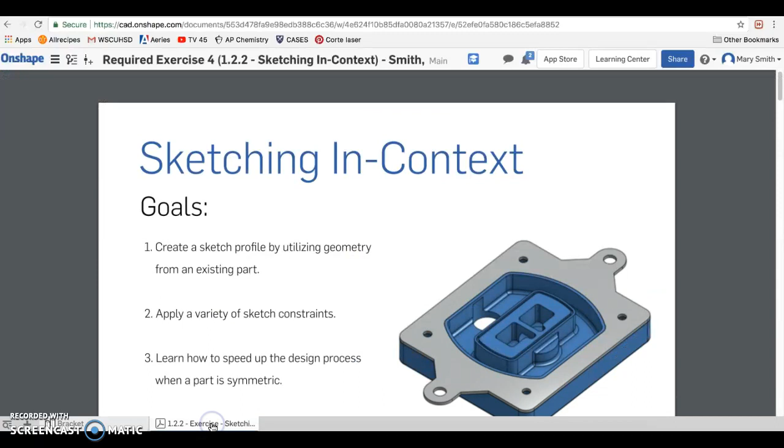On the tab down here, you've got a PDF document with instructions. There are copies of them in the classroom, but the colors and resolution is much better here. So we're going to make this part, this gray part, that fits perfectly on the blue part.

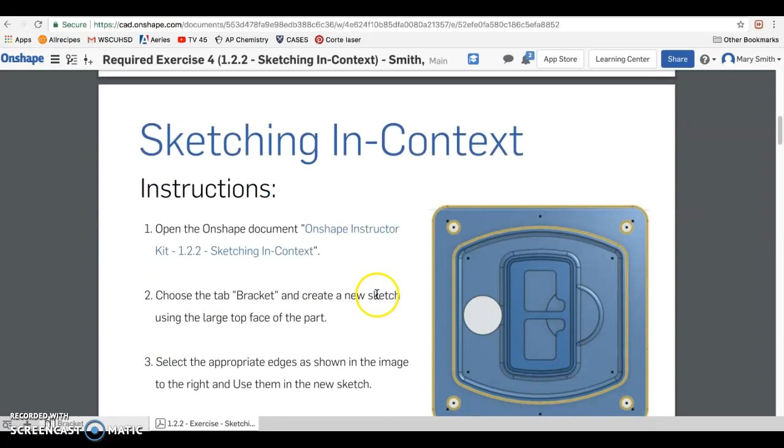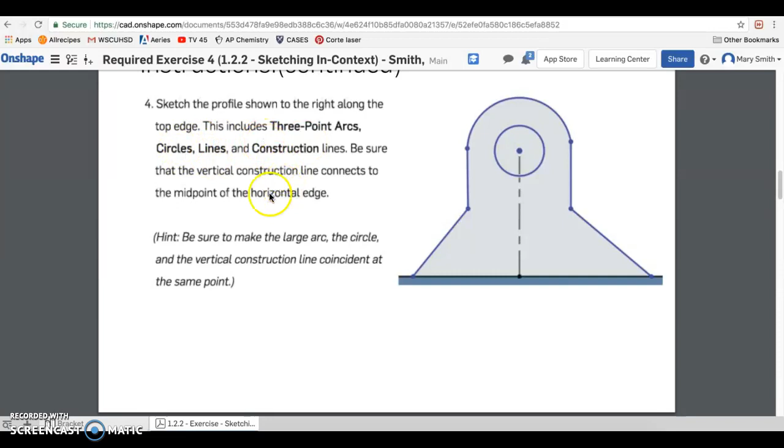First step is to take the existing part and grab some of the lines off of it to work with for our new part. And then on those lines, we're going to draw something that looks like this using the tools that it instructs us to use and with a few requirements.

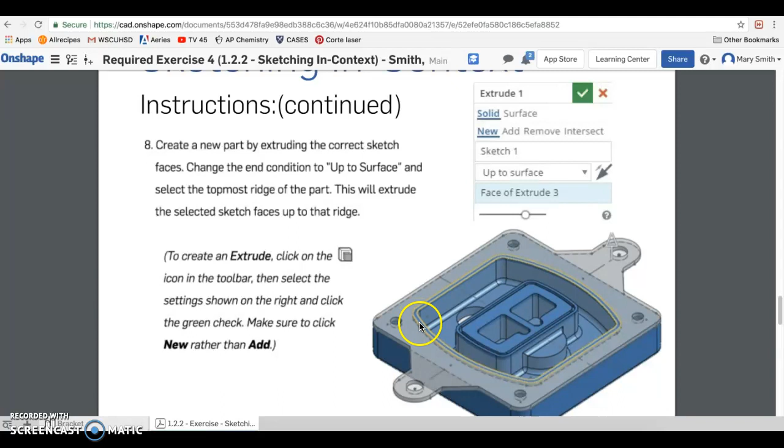And then we're going to add some dimensions to further define it. We will then take that sketch and mirror image it onto the other side of the part. And lastly, extrude the part up to this surface of the existing part that's already there.

So the big idea here being that you're going to be able to learn how to work with existing parts and make other parts that fit on them perfectly.

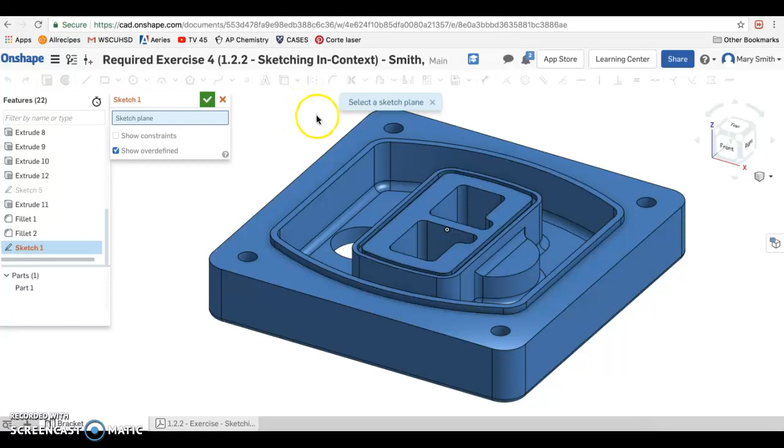So we always have to start by making a sketch, and then we can do 3D things to it. Our sketch plane is going to be the plane, the top of this part. We can then select the top of the part and notice how the parts that highlight are exactly the same shape as what it says in the instructions that I need to reproduce.

So that's why I'm picking that part right there and not like this part. Here, this is the part I want.

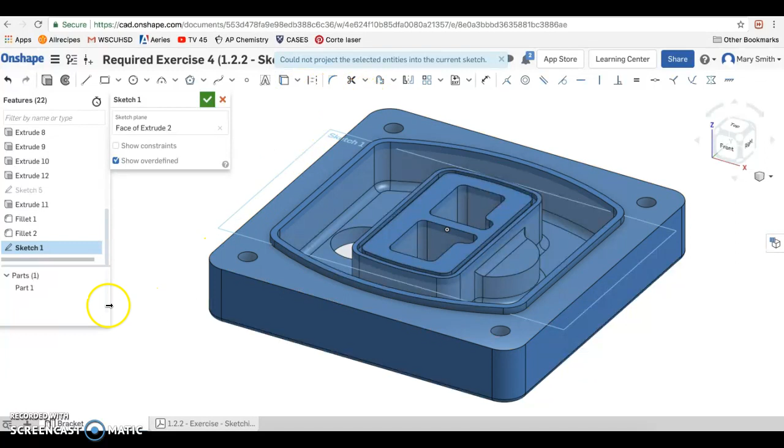So I select it, and then this tool right here, the Use tool, will project that picture onto the sketch plane so that I can use it for my drawings. So I click on it, and it did that. You just can't tell. If you come over here to part 1, that's how you can select that part.

And I can click right here and I can hide it, which allows me to see underneath it. And so now I can see what I actually did was put this picture there. This is the same shape and size as that part.

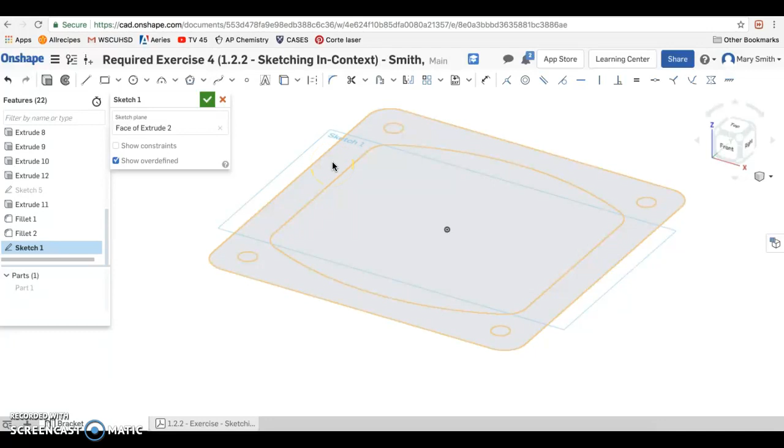So if I'm working off of this image, I know that I'm working off of that part. Also, if changes are made to that part, they'll automatically be reflected on this part. So it's pretty cool. I'm going to look at it from the top and zoom out a bit.

And I'm going to draw that thing right here. And I know what it looks like, so I'm going to draw it pretty quickly, but you would be referring back and forth to the document to make this easier.

So I'm going to make a line. It tells me that that line needs to be in the middle of the top of this bracket. So notice as I cruise over, once I get towards the middle, that little image changes telling me that I'm at the midpoint. If I click right there, the line that I make coming off of it will be coming off the middle of that existing part, which is what I want.

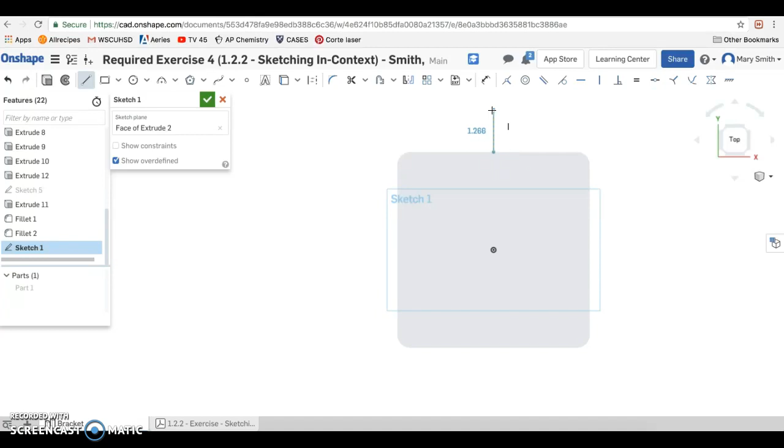Right now, I'm also can see that the line I'm making is vertical. If I move way over, that'll go away. But if you're anywhere near vertical, that'll pop up telling you that if you go ahead and click, you're going to get a nice vertical line.

I escape out of the line tool. It tells me that it needs to be a construction line. And this is the tool we can use to go between construction lines right here that are dotted and solid lines that are normal lines.

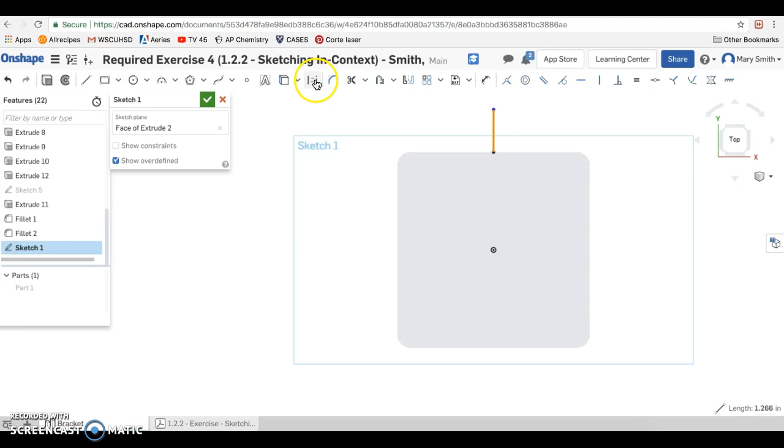And so I'm going to change this to select it and change it to a construction line. The difference between a construction line and a regular line is that construction lines can't be extruded. They're just there to help you position things, and that's all we're trying to do is position this circle right here and the part we're making directly in the middle of that line. So that's why it's important that it was at the middle.

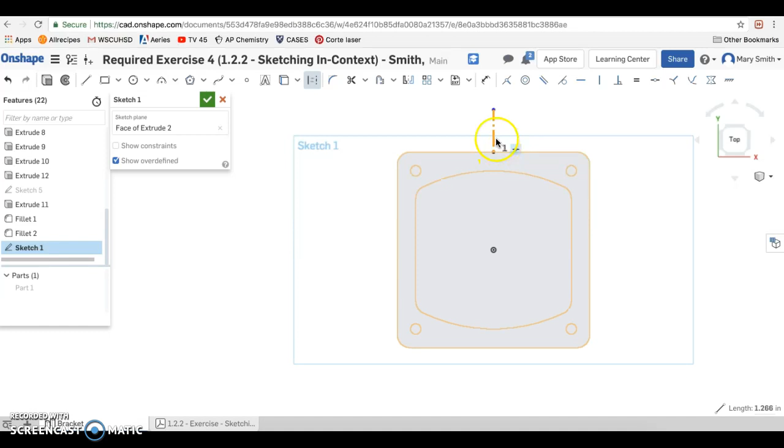So now I'm going to make a circle, and it tells me that that circle needs to be coincident with this point right here.

That means at the same spot. When I hover right over that point, this little T-shaped icon tells me that it is coincident. So if I click there and move away, I'll be making a circle that has its center point shared with that other point.

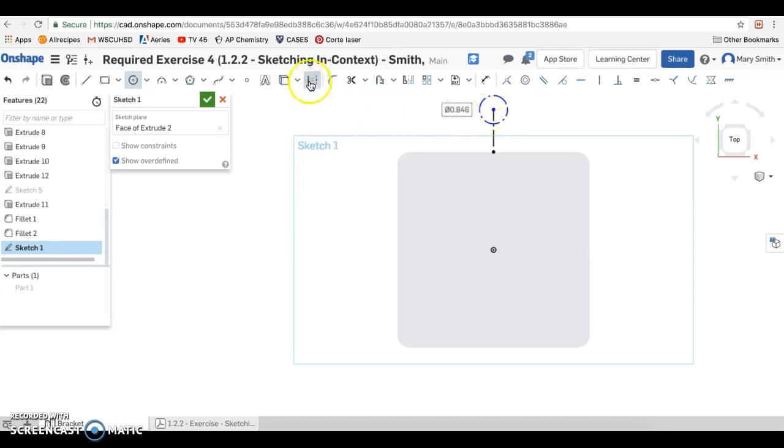They'll be coincident. I notice now that I'm still in construction mode, so I gotta click on that and be like, I don't want that to be a construction line. I want it to be a non-construction line, except I'm still in circle mode. So all I'm doing is making circles. Delete that circle.

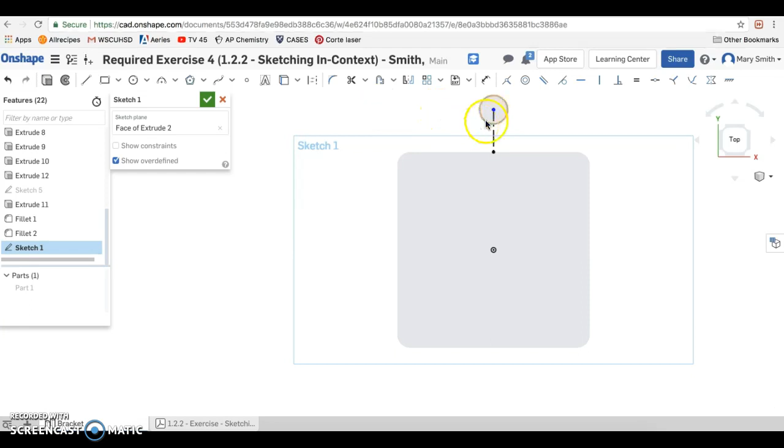There. And now I get out of there. Okay, so now that's a normal solid line, and it will be able to be used to make 3D parts, which is what we're going to do with it.

I'm also supposed to make an arc, a 3-point arc. You can make multiple types of arcs, but it's asking for a 3-point arc, which is already selected. This is also supposed to be coincident with that point, meaning that they're right on top of each other. But I'm going to show you what happens if you don't get that done right the first time. So: 3-point arc, make a line, make a point, and then drag it over to where the end of your arc is going to be. And then the third drag allows you to decide how much of an arc you want.

Uh-oh, I clicked off the screen.

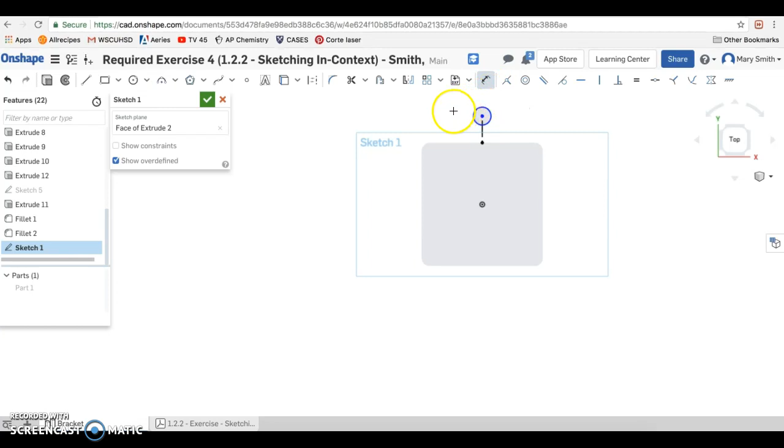Okay, so there's my 3-point arc, and it is supposed to be coincident with that, but see how they're not right there and right there. They're supposed to be in the same spot. So here, let me go over to my toolbar, and this guy right there is our coincident tool, and I can make them coincident afterwards.

If you were anywhere near coincidence as you were producing it, that feature would come up, but you can always make it happen afterwards.

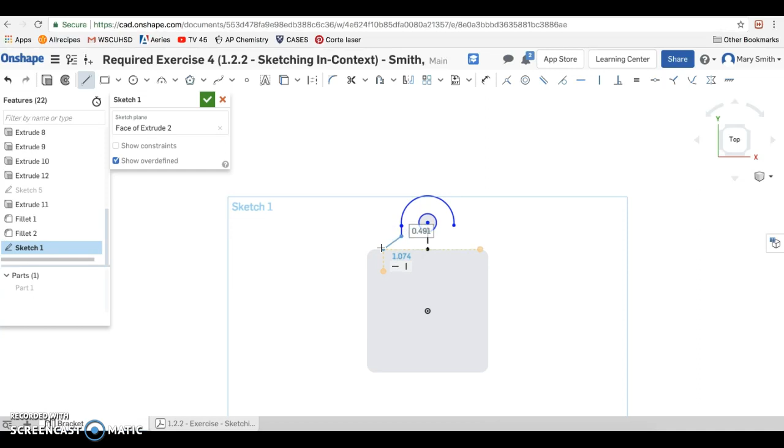Okay, so then I also need to make some lines. I know that there's a vertical line here, so I'm going to go ahead and make it vertical, and then a line going to the edge there. Escape out of the line tool.

I'm going to select it again and do the same thing over here. Make a line that I would love to make vertical. So when that vertical icon pops up, I'm going to go ahead and go with it. And then back to the drawing.

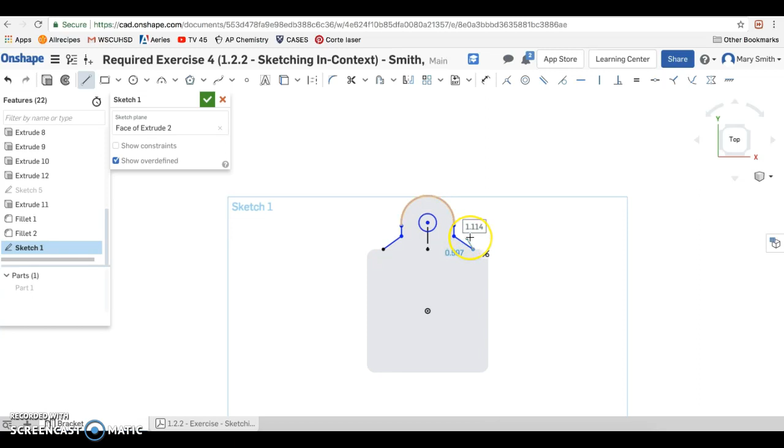Okay, so that's pretty much the sketch I need. And then the next step is to define dimensions, which again are on the instructions. I am going off of the instructions on the side here pretty quickly because I've done this before.

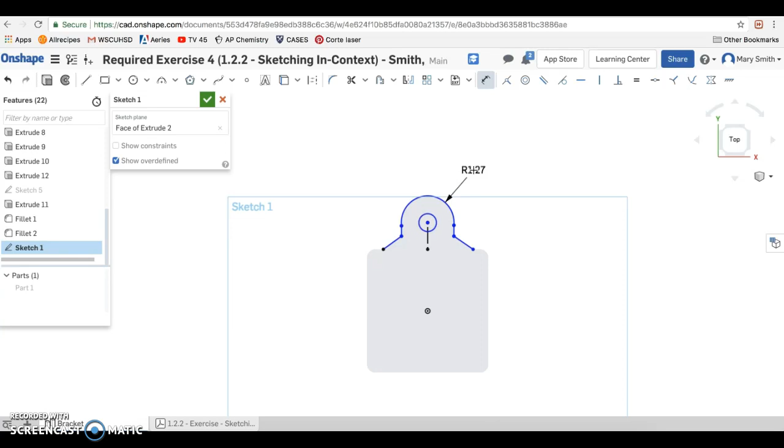So after clicking the dimension tool, if you click on anything that's circly, you'll get the chance to define the radius. The radius of this outer arc is supposed to be 15. So I marked that in and it's like, whoa, it changes it to 0.591.

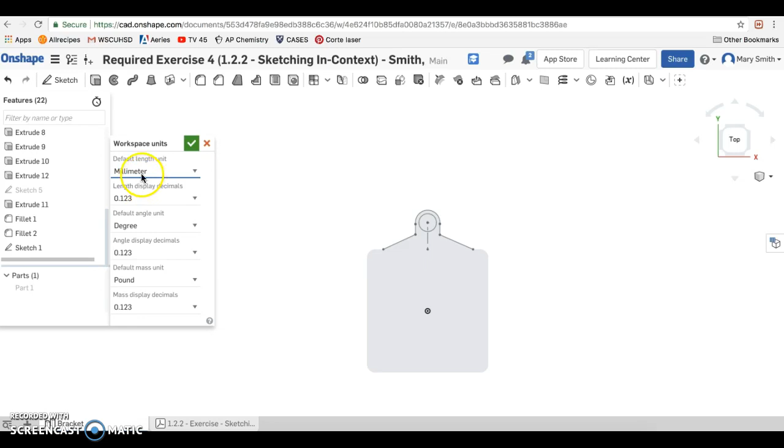Well, that's because the units of the workspace are currently set at inches, and this diagram must be based on millimeters. So I change it to millimeter and I check to say, yep, I really do want to change it to millimeter. When I click on sketch, I can double click on it and I'll be back into where I was working again. Notice how it says R15 because now it's in millimeters.

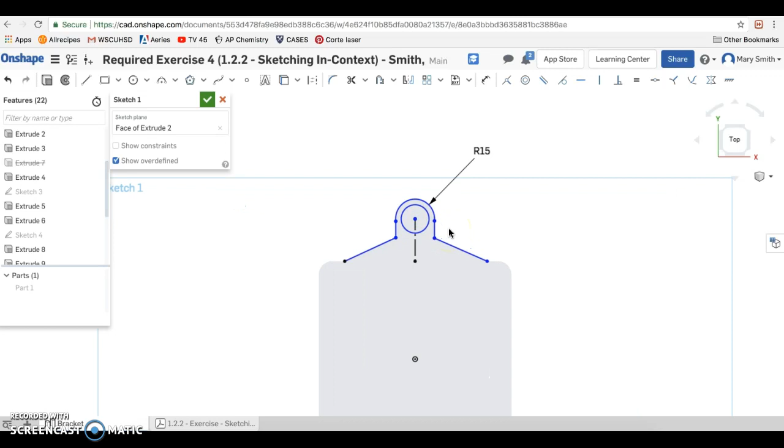Now I'm going to click on that. I'm going to zoom in. I'm going to click on the circle, as I'm not in dimension anymore. Grab the dimension tool again, click on the circle, and this guy's supposed to be 12. Make it 12.

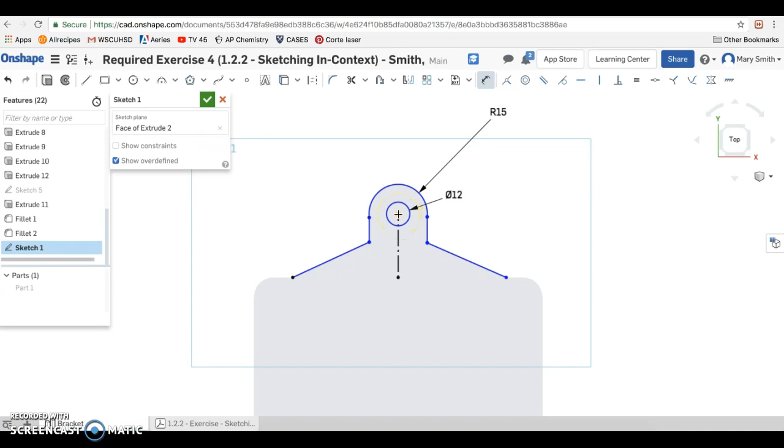Other dimensions that are provided in the diagram are the distance between this point and this line here, which is also this point. So I can set that at 30, which is what it tells me to do.

It is also interesting. This is also supposed to be up there. So I think that I goofed there. These guys are supposed to all be in the same line.

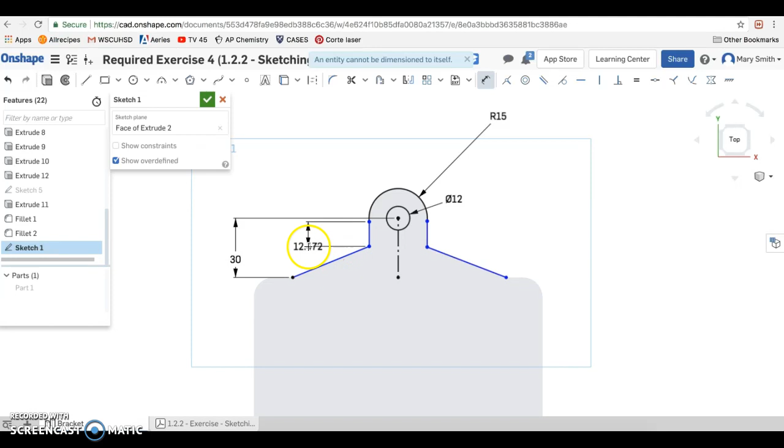And I'm trying to figure out how I can make that happen. Well, I can't do it in the dimension tool, that's for sure. All right, so I'll keep doing dimensions. Uh-oh, I didn't mean to have that other thing grabbed. Okay, a dimension between this dot and that.

Okay, I'm going to escape out of here because I'm having issues. Dimension tool, this dot, that dot, and these guys are going to be 18 apart. I'm going to click, I need to get out of dimension tool.

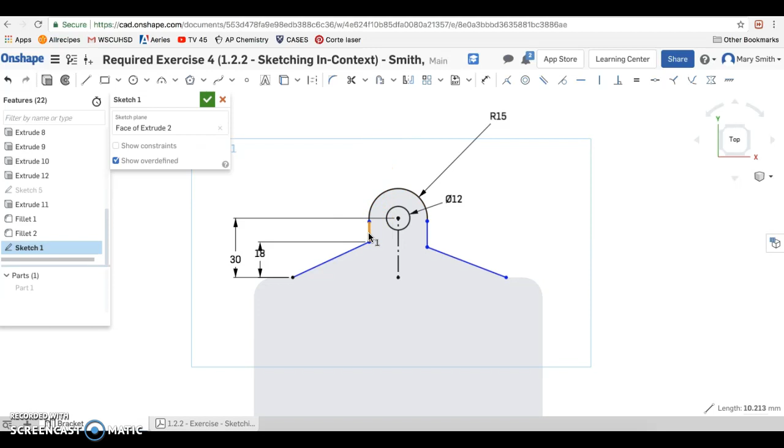I'm going to click this segment here and this segment here and make them equal in length. This segment here and this segment here are supposed to be perpendicular, so I'm going to make them perpendicular.

This angle here, right here, is supposed to be 45 degrees. That's not going to work. All right, in order to make that angle, I actually have to make a line here. So that close.

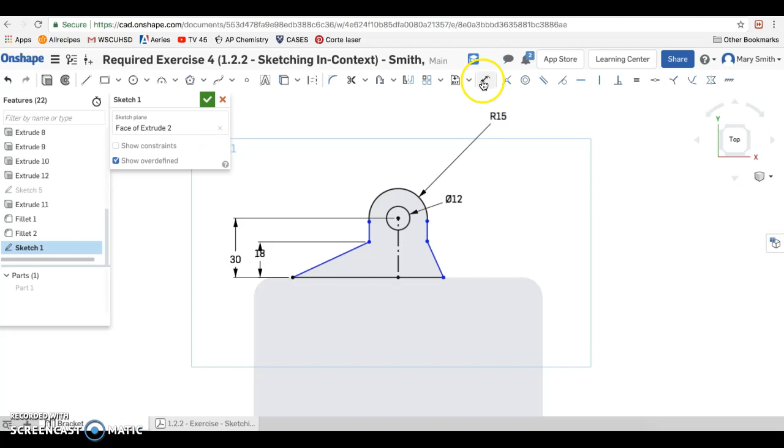Okay, so now I'll be able to select the dimension tool and go between this section and this section. I would like to define dimensions, and it'll recognize that the appropriate dimension would be an angle.

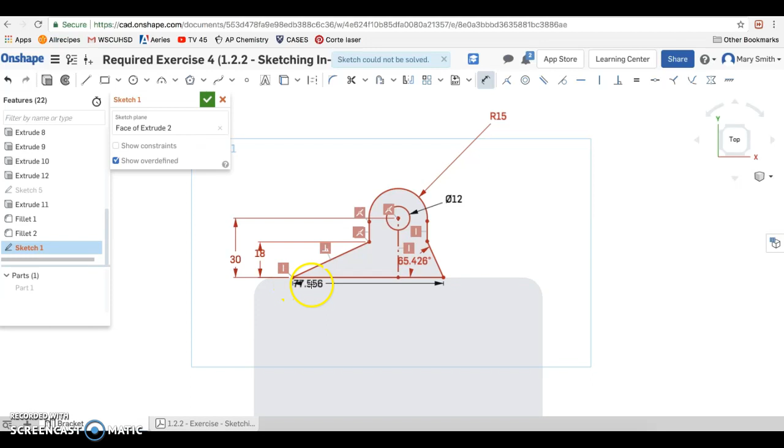Oh, you're gonna yell at me, huh? There was some kind of constraint there that I didn't mean to put on it that was making that happen. Alrighty, so I got my angle in there, good.

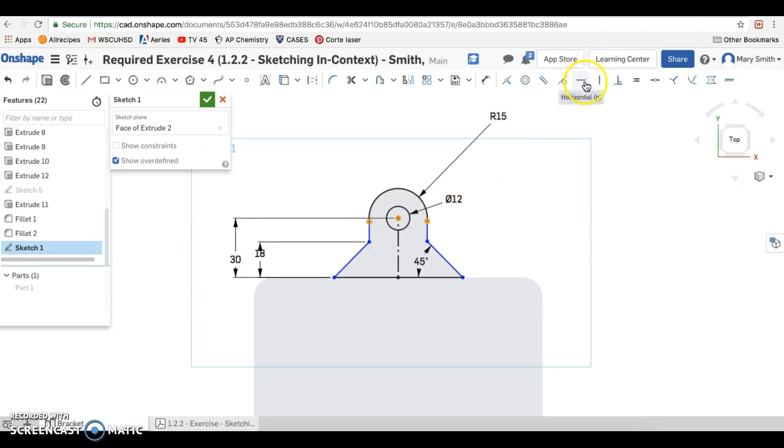The only thing I'm supposed to have in there that I kind of messed up were these guys are all supposed to be... oh my goodness, that worked. I told those guys to be horizontal and it worked. I love this program. Okay, looks like I got it. I don't know if that was the way, I've done it 5 times now differently every single time.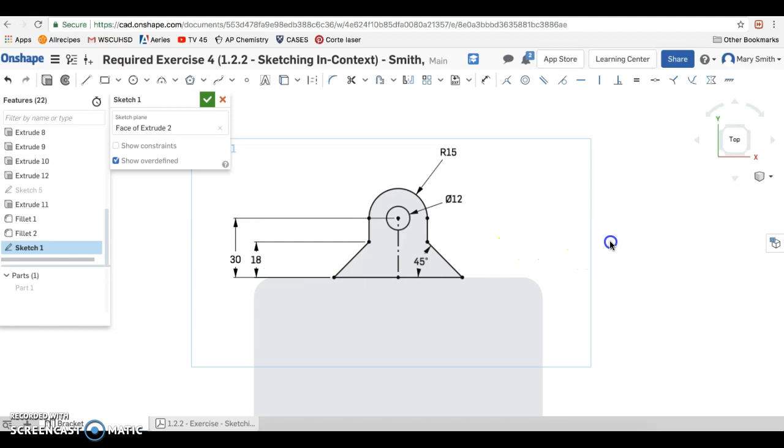So if you're having struggles, let me know. All right, so next thing is to mirror this directly across from this object. And I'm running out of time, so I'm gonna hurry up.

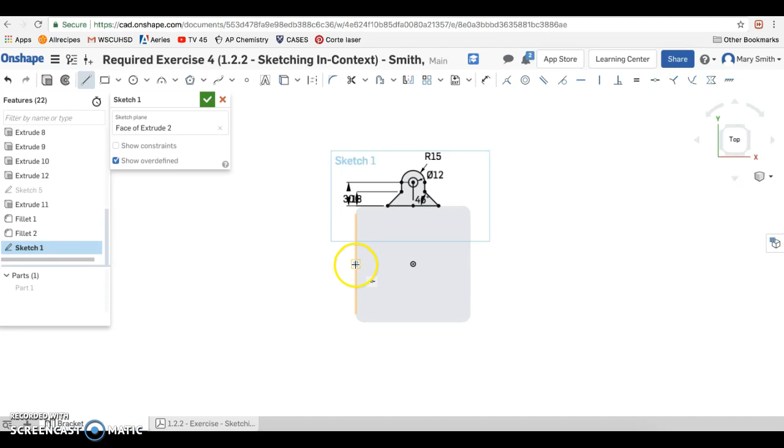I need to make a line, and that line needs to be directly in the center. Notice how I got that midpoint icon again. I go straight over horizontally, and then when I get there, I should probably be at the midpoint again. And I am. So this line is totally cutting that part in half. I am going to make it into a construction line.

And now I'm going to mirror this thing. Okay.

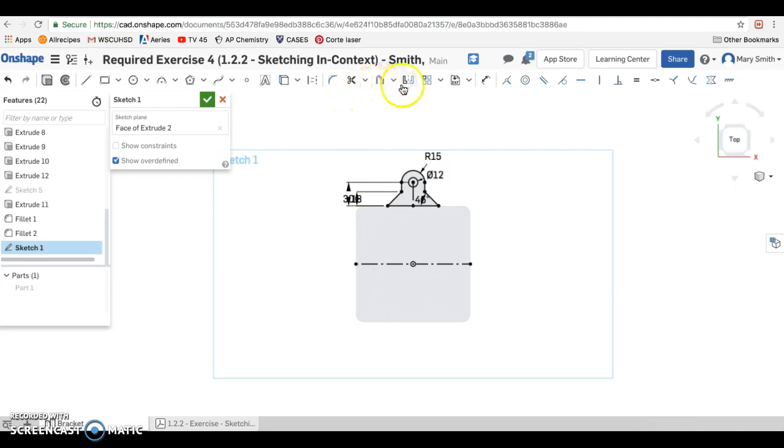So mirror tool says select a mirror line, and this is the line I want to mirror about. Select the entities to be mirrored. I could select all of these individually, but I'm just going to grab everything, and oh my gosh, look what happens. It is going to mirror that on the other side of the line I selected.

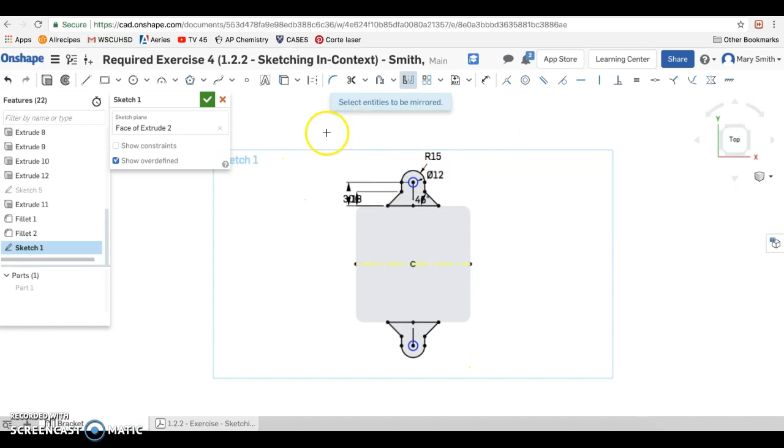So moving right along, at this point I'm actually done with my sketch. I'm done with all my 2-dimensional drawing, and if you zoom in here, you can see all the beauty. If I select my check mark, I'm saying I'm done with this drawing. Notice when I do that, all these 3D tools pop up again.

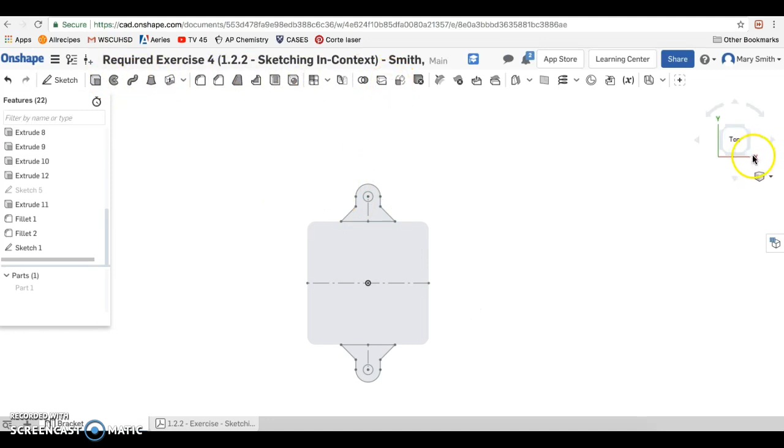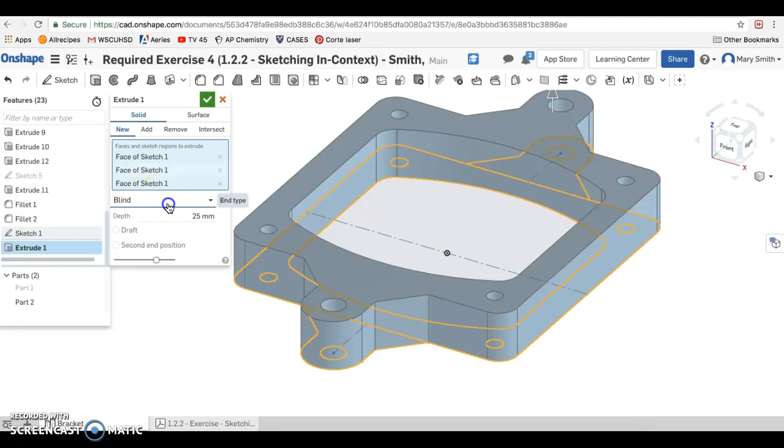I'm going to kind of look at it from the side. So I select extrude, and I'm going to pick the parts that I want to extrude. The diagram shows me making something that looks kind of like this, although not nearly as thick. So here, as we can see, it is set to blindly extrude 25 millimeters.

Instructions tell us to change it to, say, up to surface. You'll see that that is not an available option. We are going to click up to face. That must be what they changed it to. And then we have to choose the face that we want to extrude it up to.

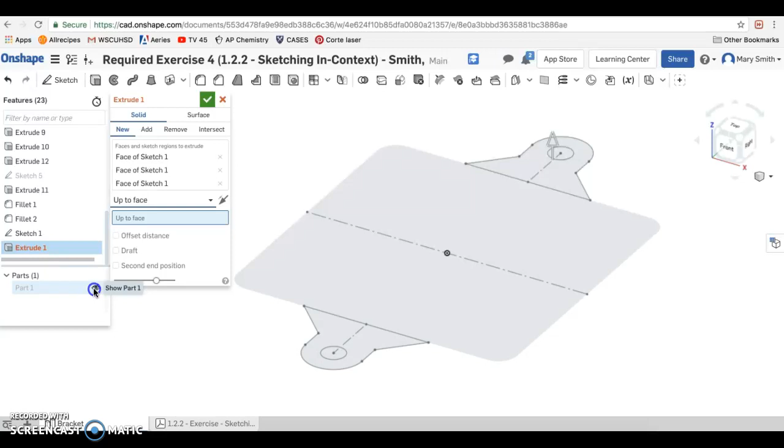It's time for me to get part 1 back in the mix. When I show part 1 again, I see that what it's asking me to do is extrude this face up to right here, just the next lip of that part. So when I select that, it extrudes it up to that point.

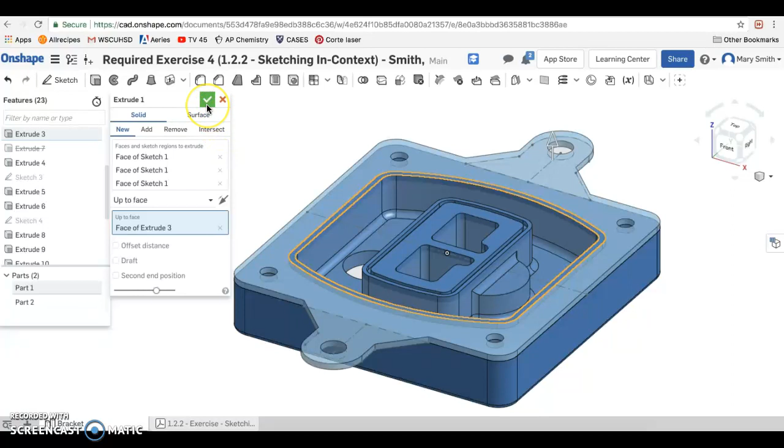The default is to add it to the part, but we actually want to make a new part, so I'm going to change it to new. And so I've selected, I can see a kind of preview of what it's going to look like, and it looks just like the example. So I'm going to say that I'm done there. So what I get is this new part that is an exact shape of the existing part that has been extruded flush to the surface.